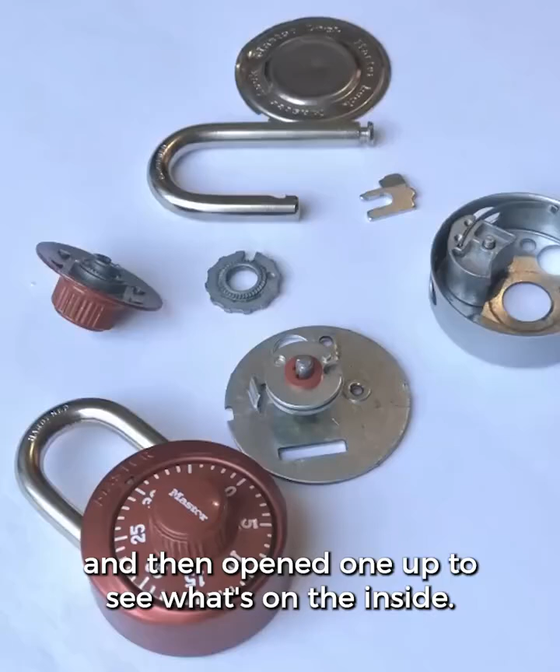Here's the case that holds all of our parts. This metal curved bar is called the shackle. It won't come out until the right combination is put in. Then it pops right open.

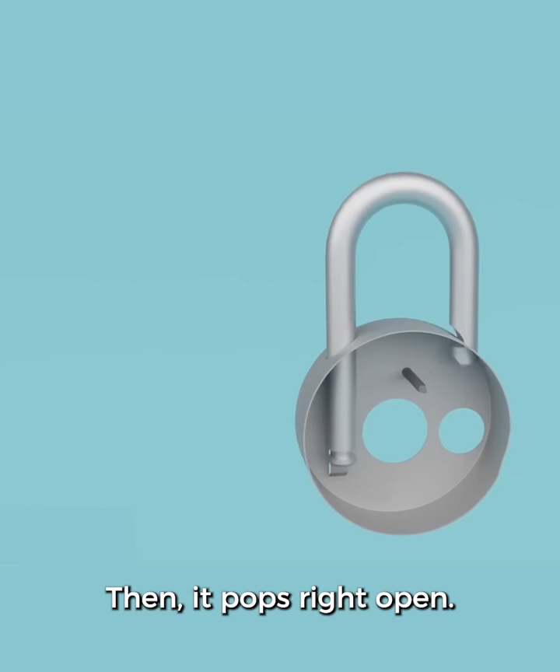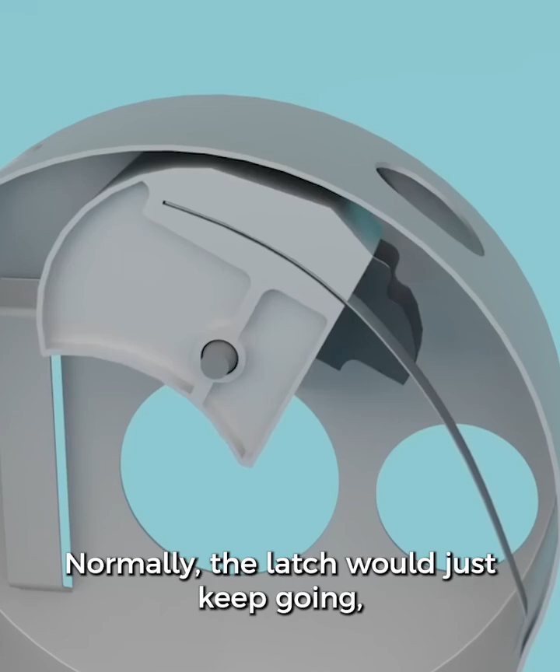This piece is called the lever. It slides right onto the bar here. The lever can rotate counterclockwise. This piece of metal wants to flex outward. Once it's bent inside of here, the tension makes the latch want to spring back to its original position. Normally the latch would just keep going, but the rotation will be stopped by this tiny bump.

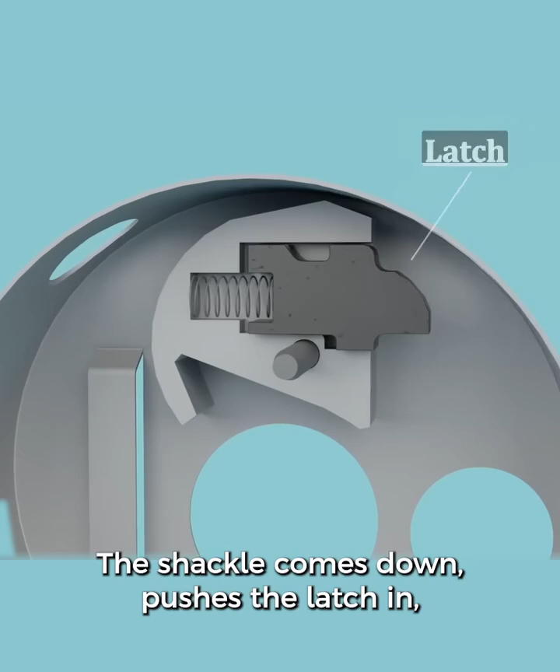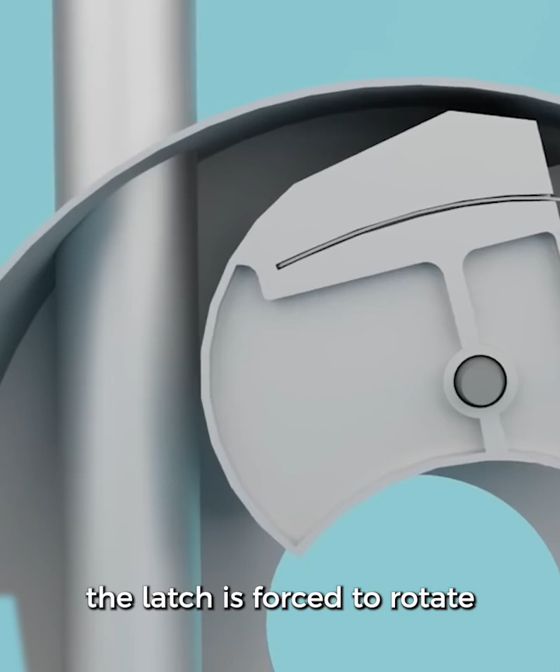The lever also has a tiny latch that is spring-loaded from the inside. The shackle comes down, pushes the latch in, and then the latch fits right into the groove, and we are locked. When the shackle is pulled out, the latch is forced to rotate to allow the shackle to come all the way out. Then the lever springs back into place.

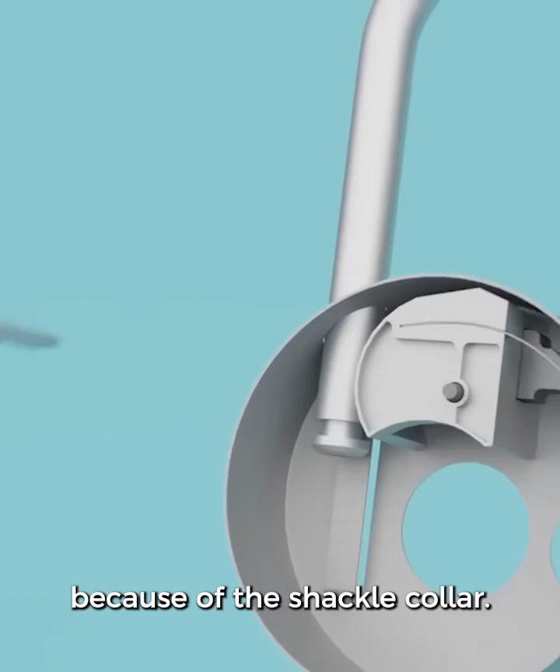Let's watch that again. The shackle can't come all the way out because of the shackle collar. It guides the shackle as it slides along here, but it stops us once we hit the very top.

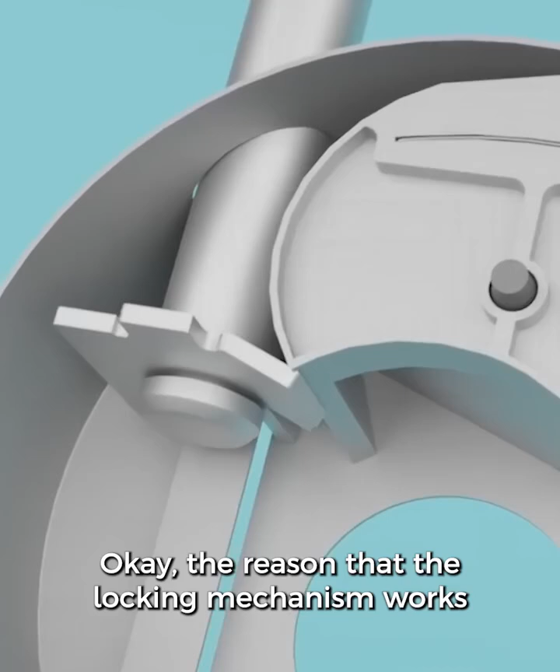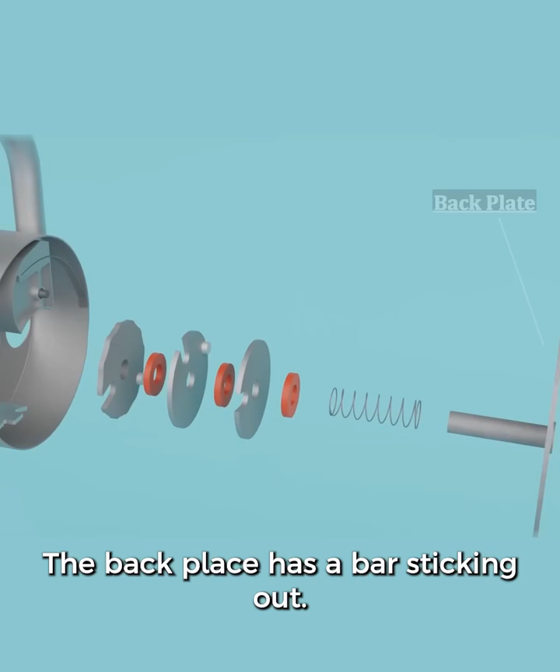The reason the locking mechanism works is that if the latch can't rotate, then the shackle won't come out. This is where the 3 cams come into play. Let me show you. The back plate has a bar sticking out. It holds the 3 cams, washers in between, and a spring at the end. The spring ensures that the 3 cams and the washers are all pressed together.

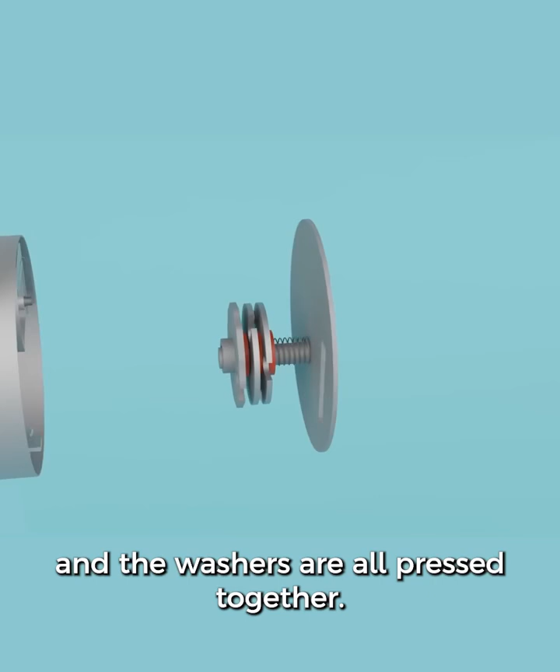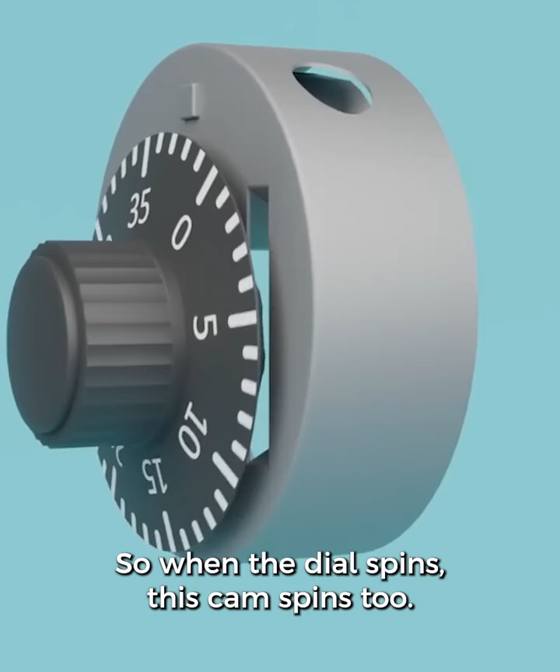Cam 2 and 3 can spin freely, but cam number 1 is actually attached to the dial, so when the dial spins, this cam spins too. This is what it looks like all put together.

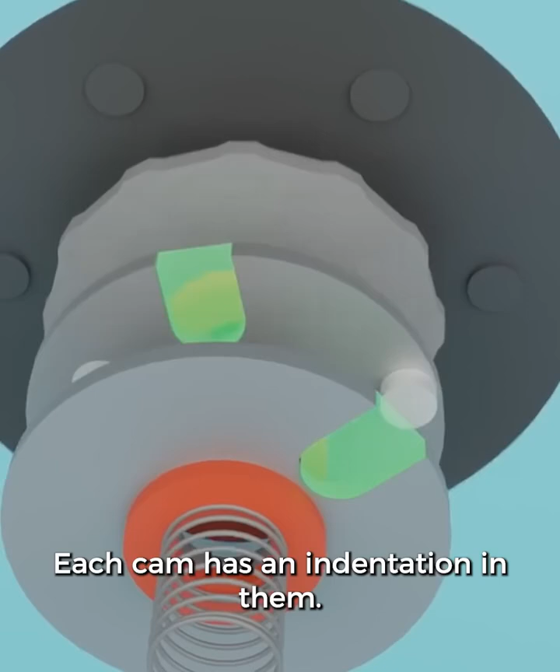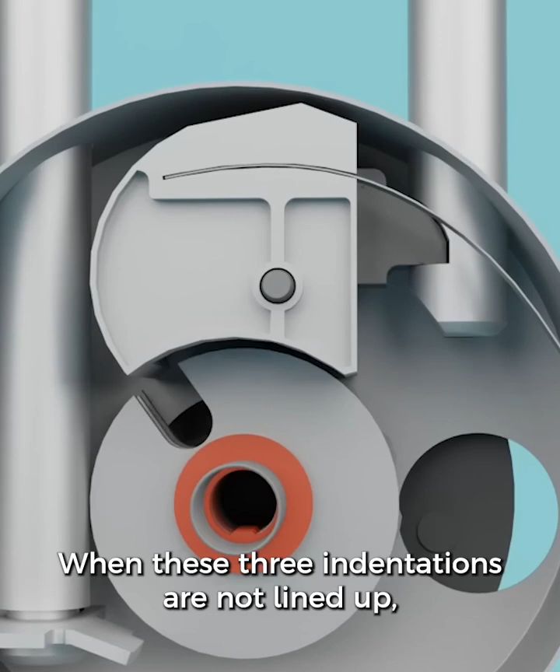Each cam has an indentation in them. The lock will open when all 3 of them are lined up. You can see how the lever can now rotate, which allows the shackle to open. When these 3 indentations are not lined up, the lever can't rotate, which means the shackle can't come out.

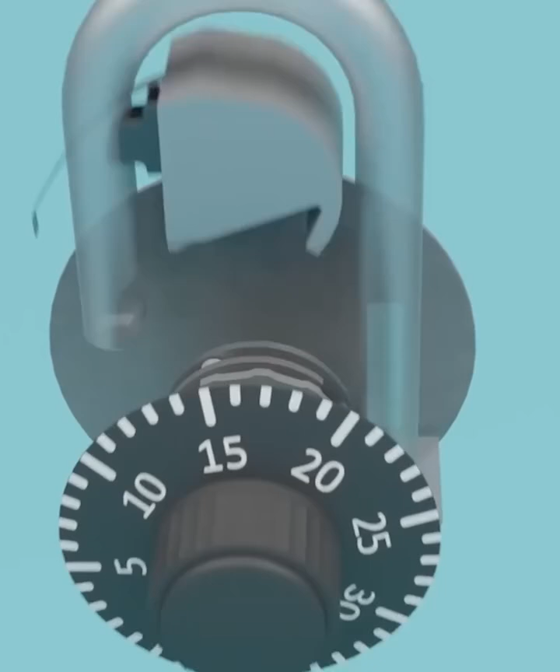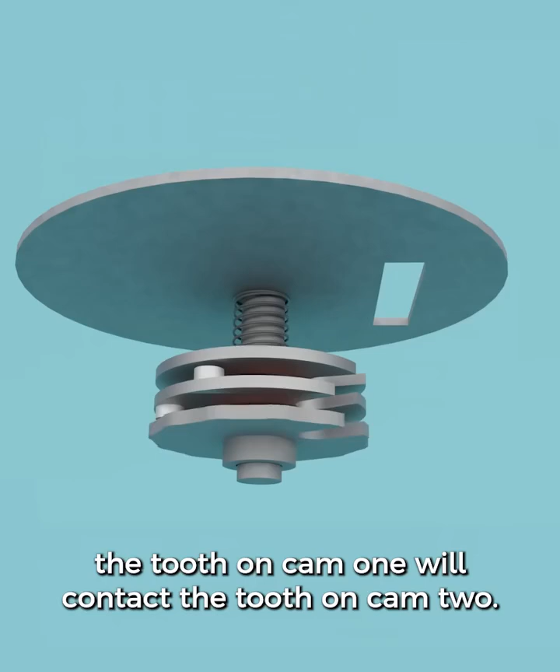So how do we line up the cams by only turning this dial? Let's look a little closer. Each cam has at least one of these teeth sticking off of it. You can see them better from this point of view. If we turn cam 1 far enough, the tooth on cam 1 will contact the tooth on cam 2, and then if we keep turning, all 3 cams move together. In fact, this is the first step to opening up the lock.

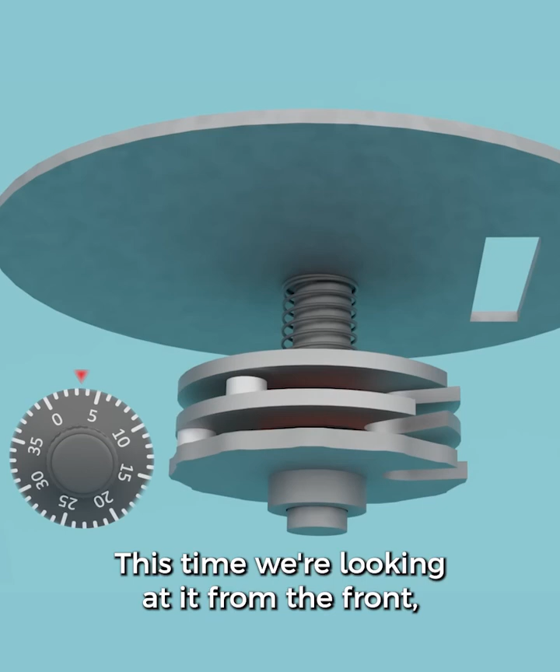Let's walk through this process on the inside. This time we're looking at it from the front, so all 3 cams will need to line up here. We turn the dial clockwise 3 times to clear it. All 3 cam teeth are in contact with each other and move as one. Now let's keep turning the dial until we hit the first number in the combination, which in this case is 21. Notice how cam 3 is now lined up right where it should be.

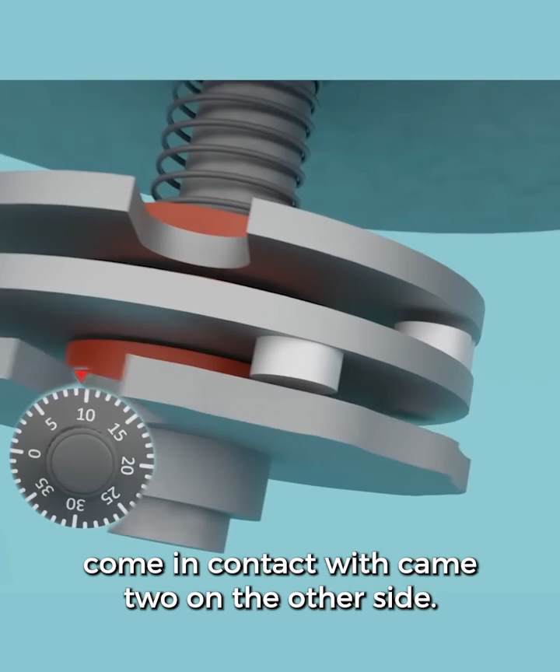Now let's work on the second number in the combination. This time we turn counterclockwise 1 full rotation. Watch as the teeth from cam 1 come in contact with cam 2 on the other side. Notice how this doesn't touch cam 3, which is still right where it should be. Now we keep spinning the dial until we hit the second number, which is 34. Now cam 2 and cam 3 are lined up.

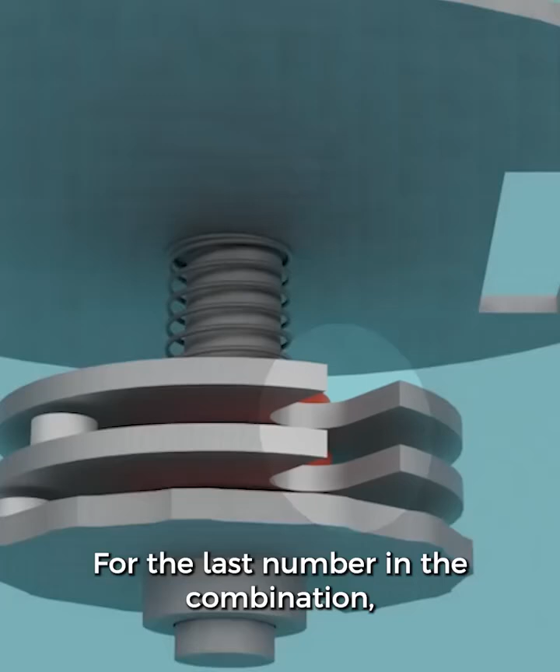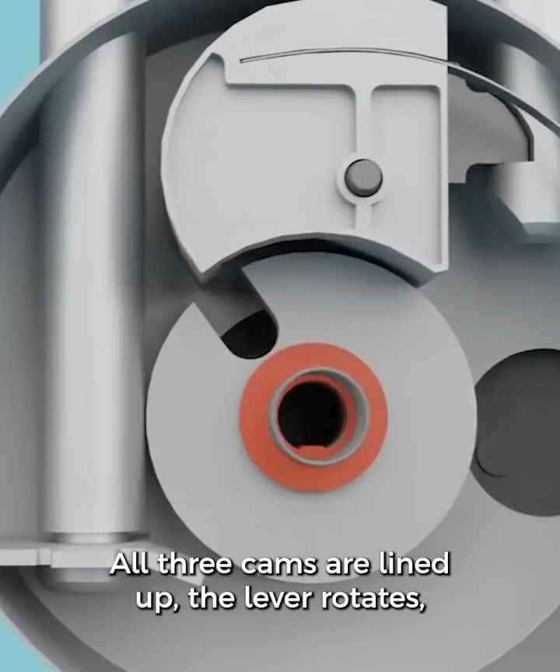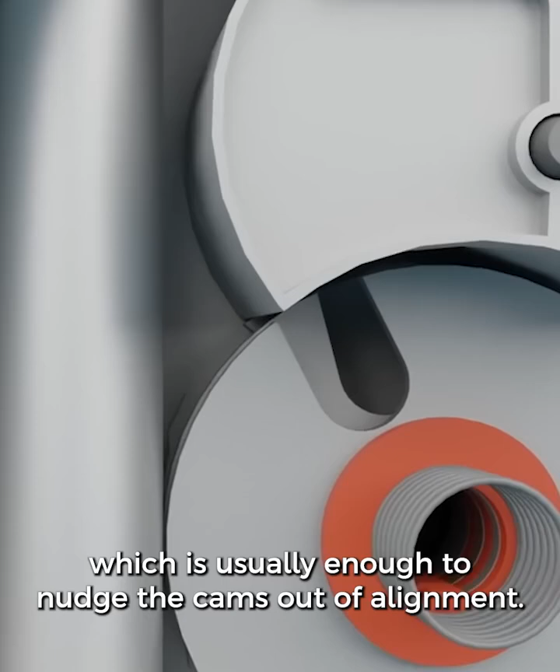For the last number in the combination, just rotate the dial clockwise until it lines up with the 3rd number. And there we go. All 3 cams are lined up, the lever rotates, allowing the shackle to come out. As the shackle is pushed back in, it comes down with a bit of a jolt, which is usually enough to nudge the cams out of alignment. This means the lock won't open a second time for free. You'll need to use the correct combination once again.